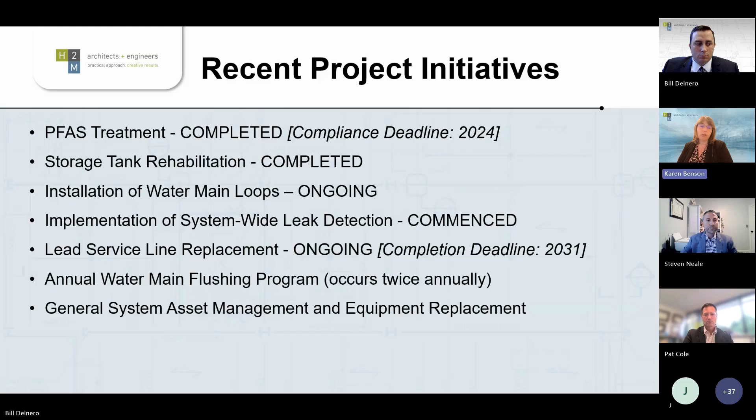And then the rest of the stuff, like the installation of the water main loops, was also something that was planned back in 2019 in response to some issues with water clarity. And they were looking already into solutions for that. But then when PFAS rolled in, that kind of took over as the priority to be able to meet the new regulations. So that was probably about the only two things that I wanted to add to that.

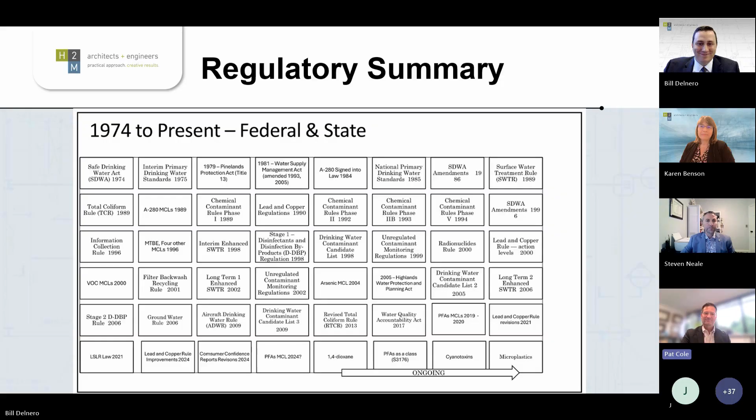Okay, we decided to take a look because every single one of those boxes on the previous page has one of these arrow-type timelines. So the top one is actually a bit on PFAS, which I'm sure everybody got several quarterly letters advising them throughout time, starting in early 2021, of what the levels were, what was being done, and seeing that progress to completion last year.

This shows that in 2018 to 2020, the DEP was adopting standards ahead of the United States EPA and requiring sampling. Then in 2024, as Waldwick was already putting their systems online, the EPA came out with lower standards, but Waldwick's treatment already addressed it to below those MCLs. So as a lot of systems are now dealing with the newer regulations, Waldwick can look at that one and say, okay, we're done, moving on. That gives that arrow of that timeline.

And then the one below, that's an ongoing one that keeps getting new things with it, is the lead and copper rule, which now includes lead service line. New Jersey's ahead of the EPA again on this one and requires inventory and replacement.

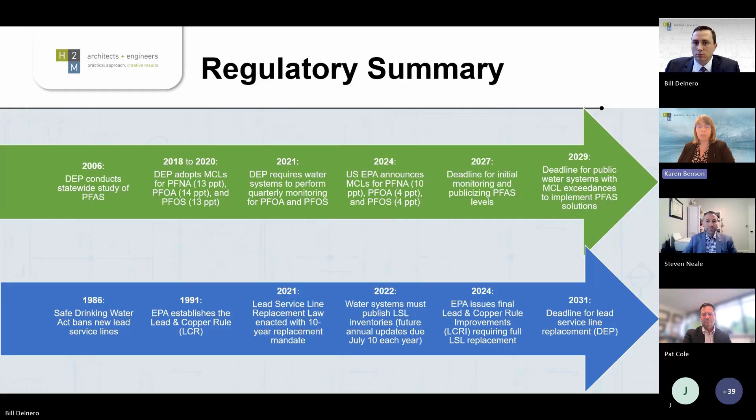A little off topic, but I'll mention it here: New Jersey's deadline for replacement of lead service lines, which is one of Waldwick's priorities at the moment, to finish that inventory and plan for those replacements, is 2031.

Okay, next please. All right, this will be another one of a shared slide, passed from me to Pat, and it gets to the crux of why we are here.

Things like iron and manganese, which you'll hear a little bit about, and just some of that chemistry that's naturally occurring in the water, reacts with stuff in the system.

That is one of the issues you likely saw with the water quality changes over the past year, although for some people it's been longer. Pat, I think Karen really thoroughly encapsulated the big picture of drinking water quality. Primary contaminants are named that way for a reason - they are the object of concern for regulators and public health officials from the federal government down through the states and to your municipal water system.

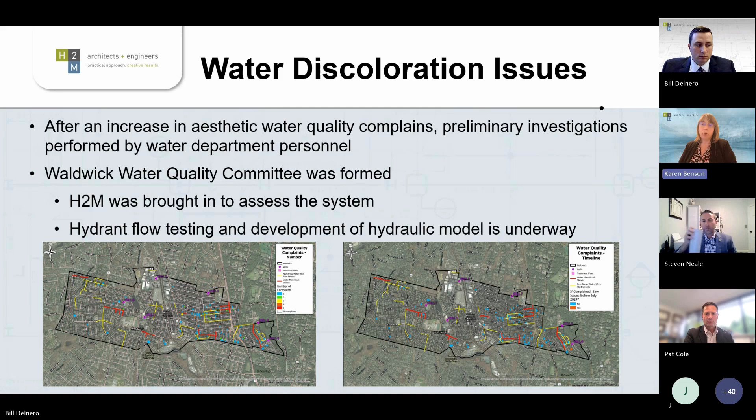But as Steve indicated, they started collecting the data more formally. We've been looking at that data, looking at the comments, understanding that some are recurring comments, but nonetheless we are tracking it, trying to understand where it falls with different parts of the system.

The timeline: June 10th was the major water main break, repaired within a couple of days. Then in July, they started operating the new PFAS system, leading to system hydrant flushing as they got complaints that went into August. Then in September, it seemed like the comments were going down a bit, so they continued operating their system.

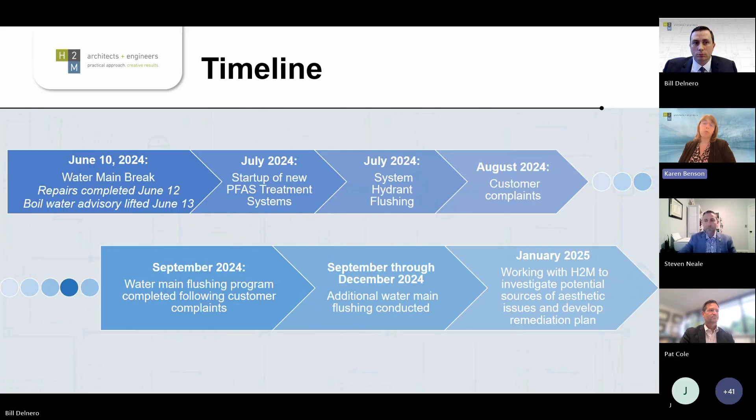Again, when you do a big project like PFAS treatment, the majority of your efforts go into getting that up and running. So in November and December, they started seeing an uptick again in comments and water quality problems. By January, they were talking more formally with us to do more than just advise on minor flushing, and to work on developing a much more comprehensive plan to identify and resolve this.

As Steve indicated, we have a couple different mapping ways of tracking this. This is one of ours, looking at number of complaints. Some of it you can see corresponds with water main breaks. We definitely saw upticks in complaints. Hydrant flushing - Waldwick is very good about notifying people that they're going to be flushing in an area, and you may see some discoloration, but still sometimes a complaint will come in, so maybe something didn't get totally flushed or the information didn't get through for whatever reason. We definitely see more complaints around water flushing events and certainly water main breaks.

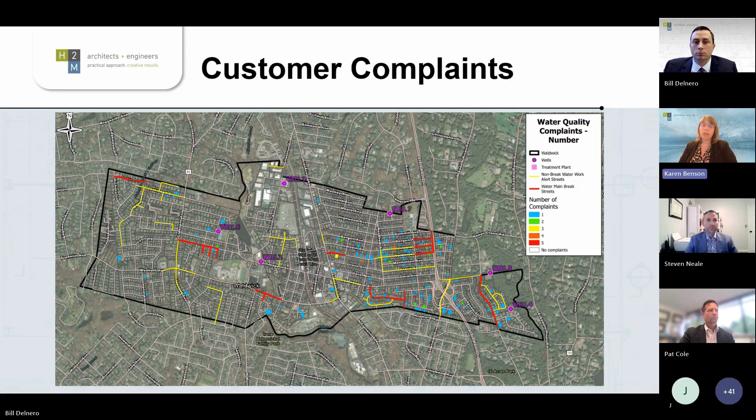All of this is being tracked. The comment form is still available and will remain available, because as we work through this, the goal would be to diminish the complaints. If you're having a problem, letting Waldwick know helps them take a look and say, this is something new, let's go investigate it.

And I'll leave Pat with the beautiful looking pipe.

I appreciate that, Karen. It's a subject that as an engineer and as a drinking water professional, I've spent a lot of my career focusing on water quality. It's a subject I've had to visit and revisit many times over.

The picture you're seeing there is not from Waldwick, but it is fairly representative of the interior of drinking water mains in almost all of the developed world. That may seem like a broad brush statement, but at the turn of the 20th century, when so many municipalities and utilities serving the public were beginning to construct public drinking water distribution systems, they were using iron pipe - often cast iron pipe, and often unlined.

While the focus of producing safe drinking water has to do with eliminating the possibility of bacteriological exposure, very often through chronic exposure to the drinking water conveyed to our faucets over years and decades of service, we begin to see corrosion develop on the interior of our pipes. For systems such as Waldwick's, those pipes can be composed of miles upon miles of pipe loop. Very often, these rusty walls that drinking water professionals describe as tuberculation - the result of corrosion circuits setting up and being allowed to exist over years or decades of service - can impart a small but chronic color to otherwise clear water.

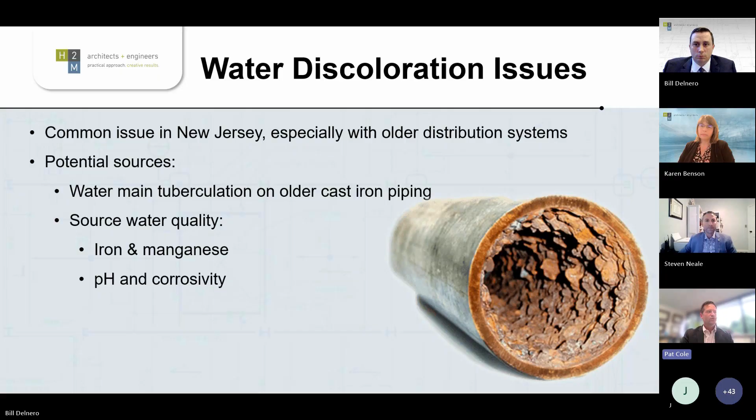So I think we're okay to move on to the next slide, which will speak to some of what we've done on behalf of Waldwick to evaluate existing conditions and get a good understanding of the layout of the existing distribution system, and where we can best concentrate our efforts to clean up the problems Waldwick is experiencing. You saw a few slides back that your water distribution system in many ways mimics the layout of the town.

That's intuitive when you think about it. All the residential and commercial parcels in town that are served need to be connected to the water system in some way that makes physical connection easy. That being said, the material composition and vintage or age of the pipes varies greatly.

One of the forensic analysis approaches we as engineers can use to figure out where your distribution system is most likely to be corroded or tuberculated, as that prior slide described, is to model the behavior and configuration of the system. When I say modeling, I mean using an electronic software system to model its layout and size, and to use field data to understand the degree to which the pipes in your system are constricted. That gives us inferential data about tuberculation and corrosion that has occurred across the system, which we represent in our model through a set of roughness coefficients.

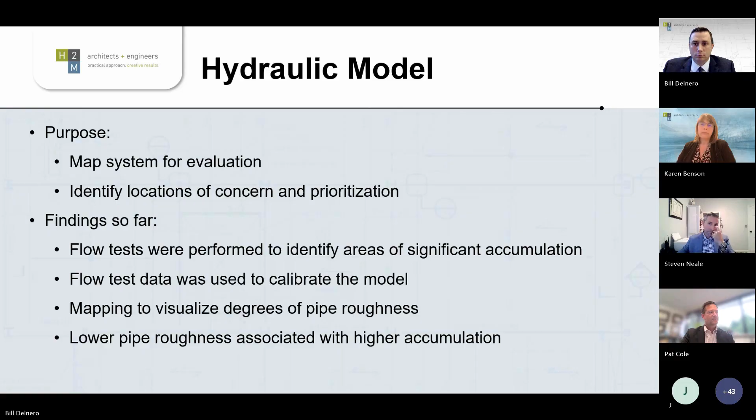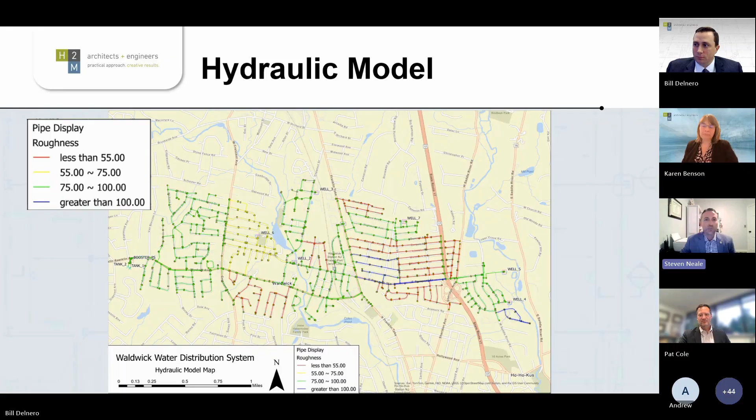Yeah, thanks for that segue, Karen. I think we'll move on and just restate, we are going to have additional question time, so please hold any further questions, there's more coming up. Yeah, yes indeed. Steve, thank you for that.

Understanding that, the next step, and one reason we were so keen to model the system, is that the objective of flushing is to achieve a scouring velocity in a given run of pipe. Sometimes distribution systems are built with sizing meant to assist in emergencies like a water main break or fire, so they can be slightly oversized. To promote the flushing necessary to scour sediment and oxidized metals that present discoloration, seen both in tuberculation and in sediment that collects in low spots, we can model a program known as unidirectional flushing - essentially a program of valve shutoffs and turn-ons that allow your operators to promote very high velocity inside the pipes, cleaning them more thoroughly. Not only does it scour sediment out of the system, but it can in some cases break down tubercles on the interior walls of pipes, giving you as customers less opportunity to be exposed to discoloration.

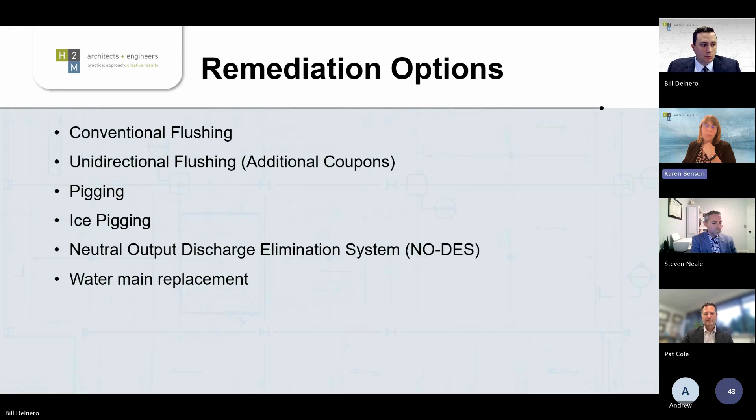Pat, okay, we're going to add the visuals to this as you're stepping through. Sure, we have the visual thing so people can have the picture and keep up with that as you're talking through it.

Right, and I have a fair memory of the order of operations here. So folks that live in town, you should have once or twice in your lives seen a distribution crew flushing a hydrant. Again, that's standard operating procedure and occurs typically in the spring and the fall.

The objective is to simply promote the clean distribution of drinking water throughout the system. We may, as a result of our modeling, recommend an increase in flushing your distribution system, both at points where discoloration has been reported, at dead ends, and at points where our modeling recognizes low points in topography or places where chronic slow flows occur.

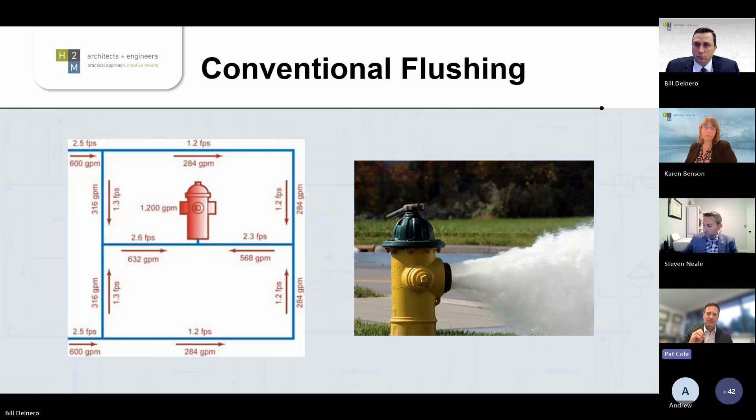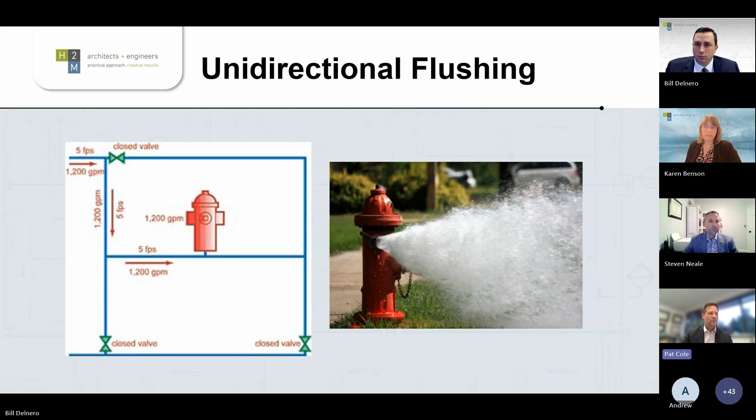Moving to the next slide, once you've exhausted flushing as an option, and if we have not achieved our water quality goals, the next approach is analogous at the system-wide scale to what many folks know as angioplasty, using so-called PIGs, which are essentially mechanical scraping devices to remove corrosive deposits from the interior pipe walls. This is a very well documented industry approach.

The big differentiator between this and either conventional or unidirectional flushing is the use of the mechanical scraper, and the fact that this work is typically performed by dedicated professionals, so there's a cost difference since you pay for their time and materials. Our recommendation, if we make it at all, will be to deploy it in locations where the greatest potential for improvement is suspected or observed from pipe couponing—taking samples and verifying the inferences from testing that there is tuberculation or chronic corrosion in the interior of sections of pipe walls.

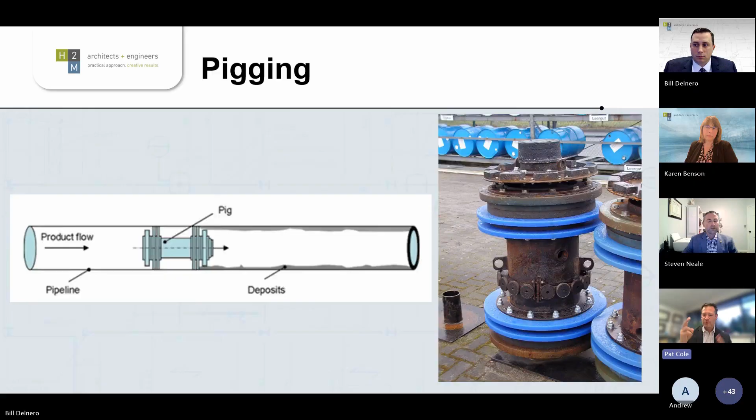There's another format option for pigging, for mechanically scraping: ice pigging. This uses a slurry of ice to mimic the function of the mechanical scraper, but it's often used for distribution systems that either have more delicate pipe walls, are extremely aged, or have a series of very tight bends that won't allow the safe passage of those mechanical scrapers or pigs.

So it's sort of a plan B, if through the process of testing and couponing we find places in the distribution system that we want to clean and keep in service, but that we're concerned about mechanically breaking down.

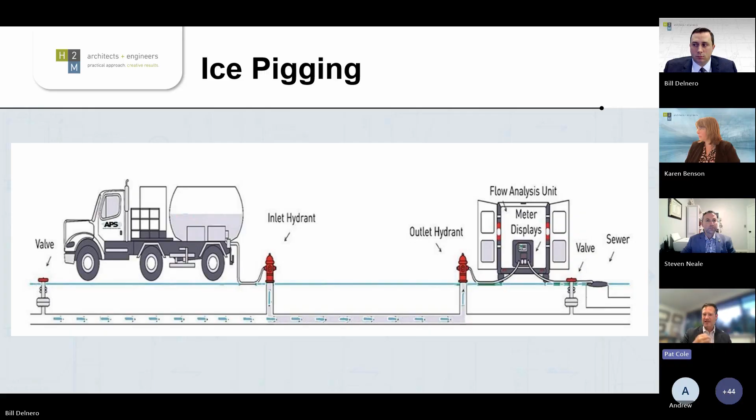So we move on to the last of the flushing and scraping, or internal removal options, because it's the most costly. This uses a portable unidirectional flushing system with filters mounted on a truck body, trademarked as the so-called NO-DES system. There are professional vendors out there who serve distribution systems like the one Waldwick owns, and this system can be deployed to pointed, selected locations in town to develop the highest velocities the pipes can mechanically tolerate, using hydraulic forces to scour out the interior of your pipe walls.

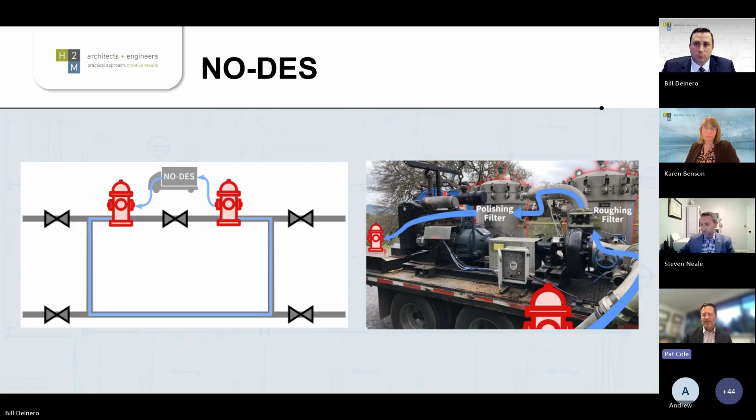Of the options we described on a unit basis, this is the most expensive, but has the potential to be the most physically effective. We initiated this conversation by scaling the options from the simplest and least costly to more complex and more costly, and this is where we end up as the option of last resort when it comes to scouring your existing pipes.

The next option, which I think everyone on this call could have inferred we'd discuss, is replacing some of your water mains. If some have low physical integrity, have exhibited frequent main breaks in the past, and if we can make an inference about their internal quality or coupon them and verify that visually, it might make the most sense for you to replace certain lengths of water main.

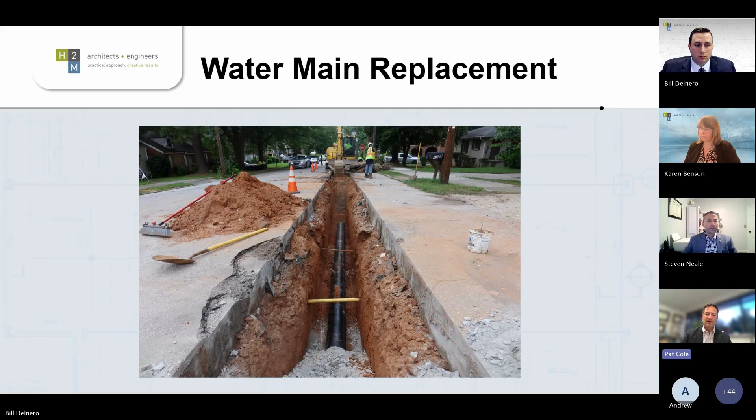The reason we approach that option so hesitantly is because, as we know, it's a challenge to make capital investments in anything a town owns, since every municipality is conscious of how it spends money—and for good reason. We all maintain a household budget, and the municipality does it on the townwide or borough-wide scale. This option, while potentially highly effective—very likely the most effective—would cost the most in terms of capital investment.

So I'll just pause there and return back to my colleagues. Bill and Karen, have I missed anything that you would consider pertinent in that description?

No, I would just reaffirm that essentially the steps up until now were to get us to the point of figuring out which of these would be the most beneficial for the borough of Waldwick and most effective for different areas. Again, it's probably not going to be a one-size-fits-all solution. It's going to depend on those parts of the system.

The other thing I would mention is that toward the very beginning, when Steve talked about the various projects they're doing, one was called asset management. Water main replacement program is definitely part of that. It's actually required for mains after a certain age. Waldwick goes through every single year; they need to assess all the lines, the ages of the lines, and how many breaks they're seeing, so they can continue planning for it.

Things like PFAS treatment and lead service line replacements impact that too, in that they could have the best ideas of how to tackle this problem, and then a new regulation comes out from the New Jersey DEP or EPA, and being health-related, it takes priority and steps ahead.

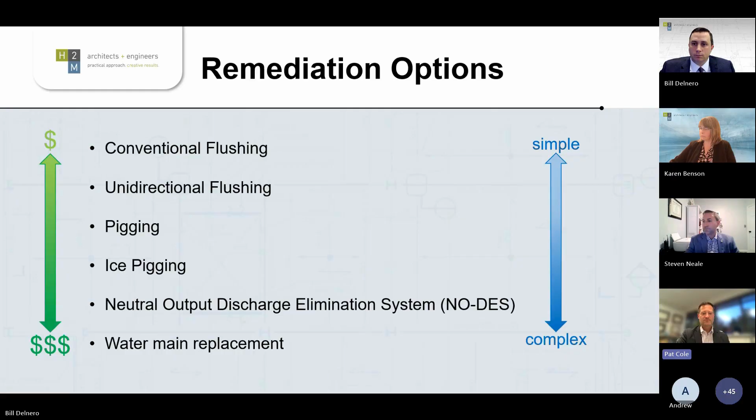We began this presentation by talking about both your sources and the distribution system that you manage. The borough itself is over 100 years old, and there are parts of the system that have aged and exhibited corrosion. There are parts that are very young and have also corroded, or exhibited internal corrosion, faster than we might have anticipated.

The important thing to remember is that those pipes are carrying water that we intentionally treat, both to disinfect and remove contaminants, but also to perform a process known as passivation, meaning to make the water itself less aggressive to the interior of pipe walls. Once we sort through the data from physical system testing and modeling, a secondary but potentially significant aspect will be evaluating the stability and passivity of your treated water quality in the distribution system, and identifying ways to make your treated water more passive, less aggressive, and less prone to promoting the corrosion you're now dealing with, which has occurred chronically over years or decades of service.

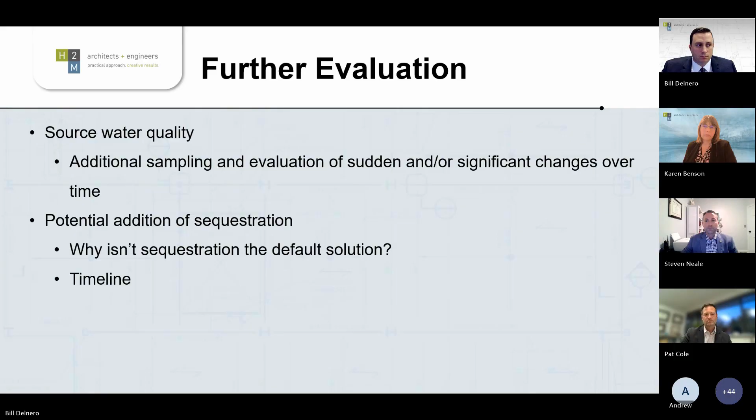There are next steps involved in work of this nature. Being honest, straightforward, and properly humble about this, the evaluation itself is a work in progress. It's primarily a science, but also a bit of an art. There's an intuition involved in spending our time most efficiently on your part to achieve the best objectives, in a time that makes it relevant for you as users.

We're going to spend the next several months trying to give borough leadership the best bang for its buck, an understanding of what we know about your sources, distribution system, and water quality, to give you the best chance over the next several months to several years to optimize that system. When I say several months, I mean deploying simpler, lesser costly solutions. When I say several years, I mean planning for, potentially designing, and finding funding for the handful of places that might justify actual pipe replacement and investing more significant sums of money.